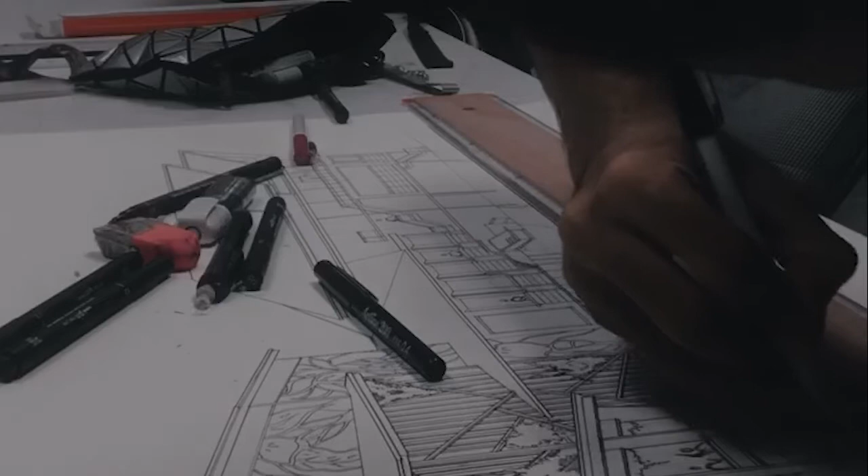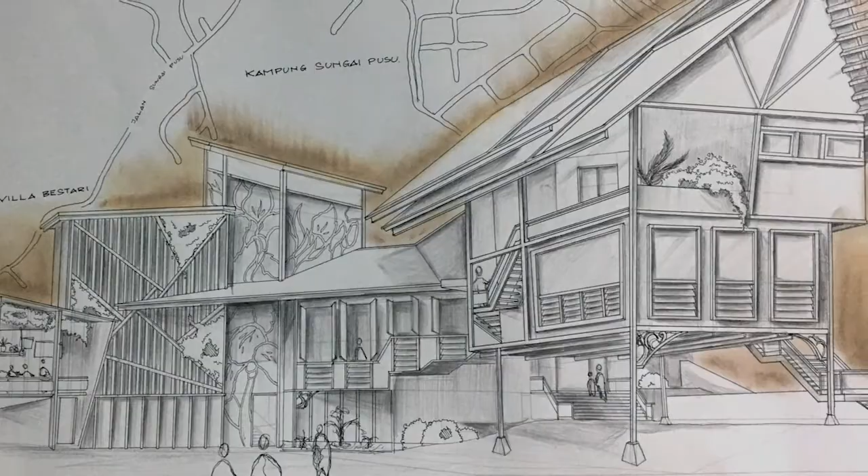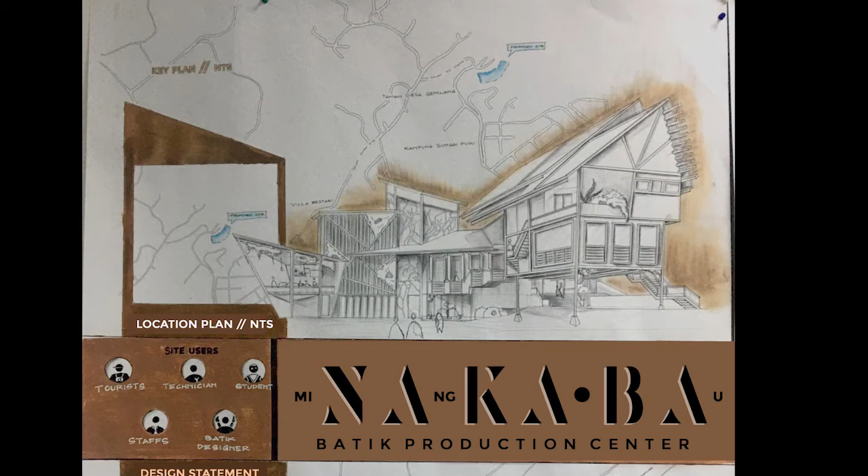Today I'll be presenting about the Nakaba, which is a batik production center that functions as a commercial and education center. The building specializes in providing job opportunities and revitalizing batik culture in Kampung Sungai Pusu. The site, Site B, is located on a steep slope beside Jalan DJ Utama. The building design signifies the colliding culture of Minangkabau, which is the origin of Kampung Sungai Pusu residents, and modern contemporary design to highlight the client's signature batik style. The users of the building will be tourists, technicians, students, staffs, and the batik designer.

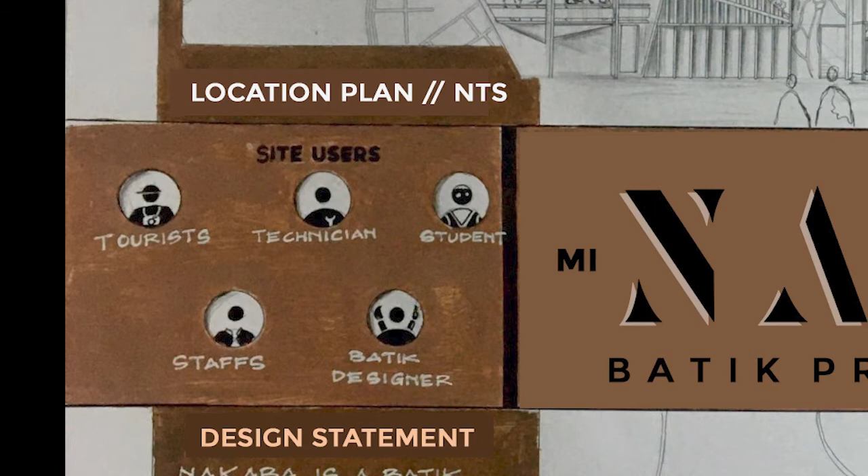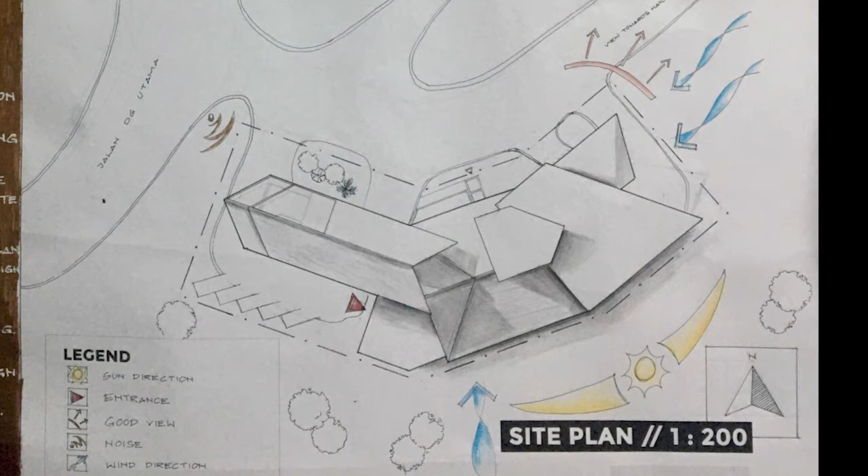According to the site plan, the site is located on a steep slope while having a prevailing wind that comes from the northeast and south directions. The building has openings that face toward the northeast and south to allow natural ventilation into the building, as well as to eliminate chemical gases from the batik workshop easily.

The client for the building is named Farah Mohan. She lives in Damansara KL and owns a batik business known as Novak Batik. Her preferences are she likes to integrate nature within space, likes using bamboo as a building material, prefers an interior of bohemian concept, values her own privacy and prefers a private studio. She also likes the concept of being mysterious and inspirational towards others.

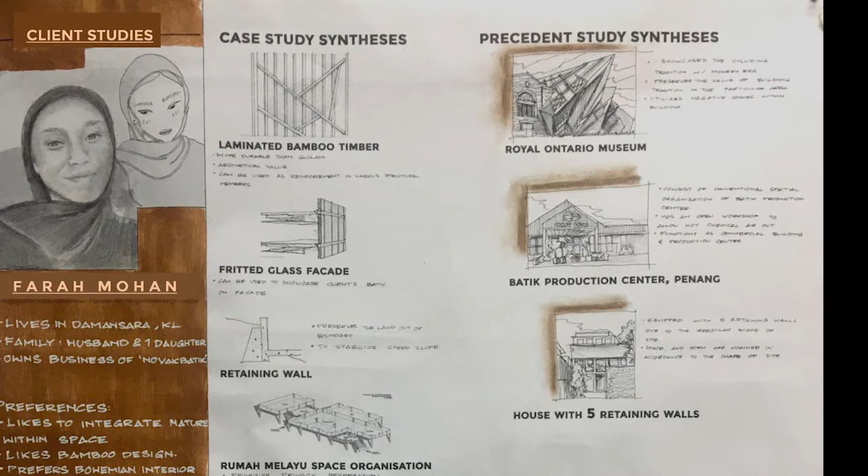For the first case study synthesis, it is to apply laminated bamboo timber since it is more durable than glulam, has an aesthetical value, and can be used as reinforcement in various structural members.

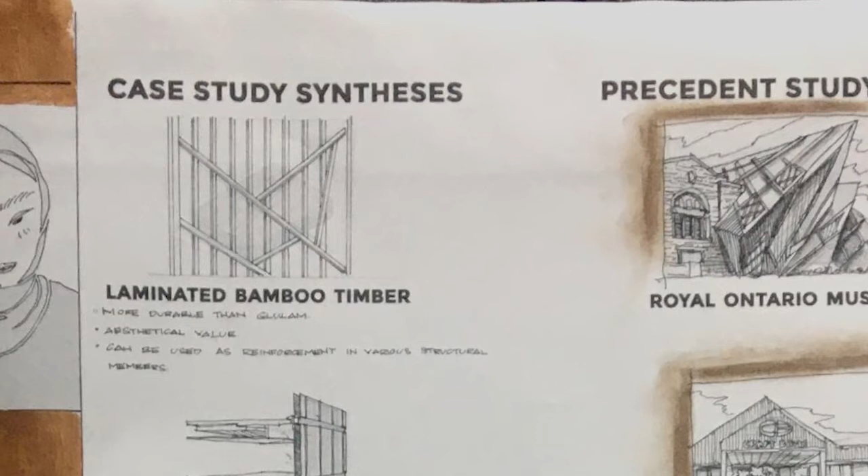Next is the application of fritted glass facade. This idea can be used to showcase the client's batik on the facade of the building, similar to Menara Suasana in Putrajaya. The next study is to apply a retaining wall on the building since it is located on a very steep slope.

It will preserve the land of the boundary as well as stabilize the steep slope itself. The last case study is to apply the Rumah Melayu space organization within the building.

This is because the Rumah Melayu has an ideal way of segregating the privacy of spaces. For example, the lobby of the building acts as a serambi of the Rumah Melayu, while the corridor to access other spaces acts as a rumah ibu, and the office and private studio act as a kitchen, similar to the Rumah Melayu, which has the highest privacy.

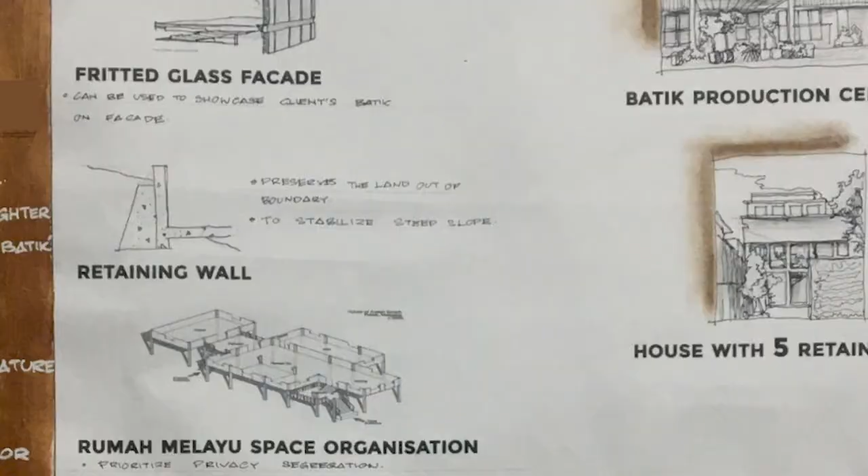Next we move on to the precedent study synthesis. The first one is the Royal Ontario Museum. This building showcases colliding tradition with modern era, and some parts of the building since centuries ago are preserved to show the traditional value of the building, and also utilizes negative spaces within the building as well.

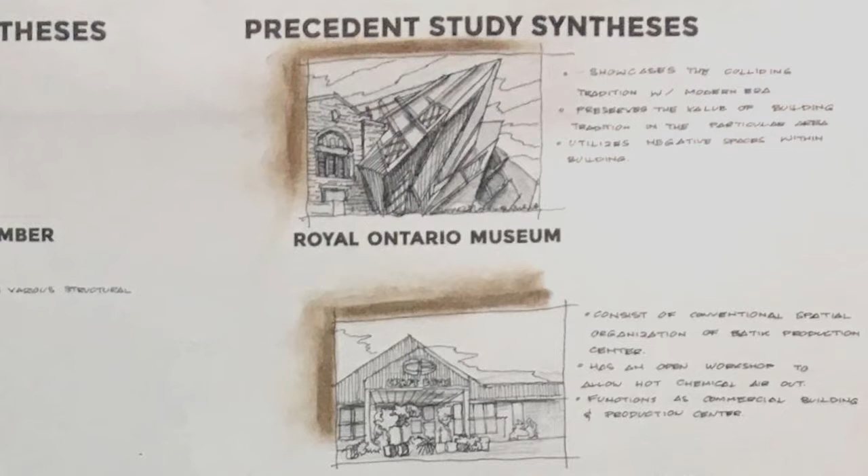Next is the Batik Production Center in Penang. It consists of a conventional spatial organization of a Batik Production Center. It also has an open workshop to allow hot chemical air out and to allow natural ventilation into the building, while functioning as a commercial and production center as well.

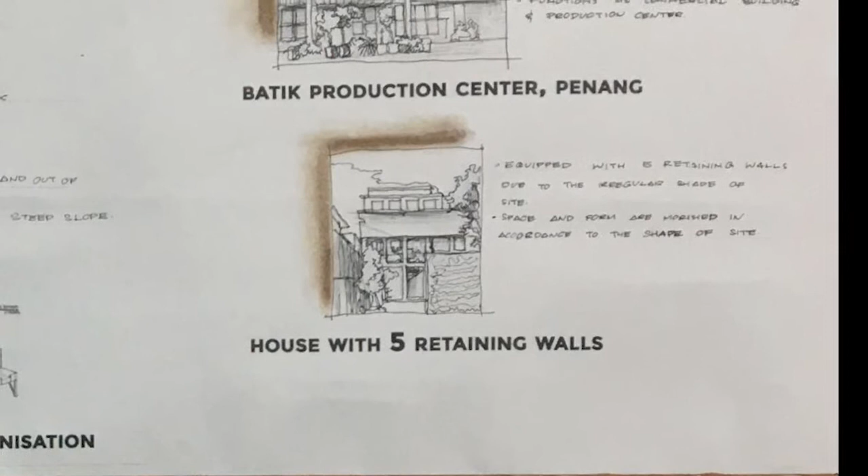The last precedent study is House with 5 Retaining Walls in Japan. By the name, it is equipped with 5 retaining walls due to the irregular shape of the site, and the space and form are morphed in accordance with the shape of the site.

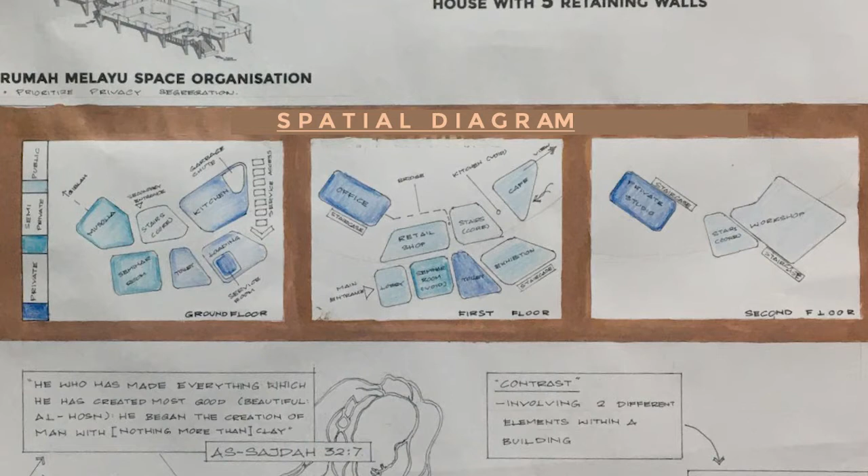Next we move on to the bubble diagram of the building. As we can see from the ground floor plan, most spaces are semi and private spaces. This is to ease access for services within the building, while the first floor plan is known to be the prime level of this building since all of the commercial spaces are placed within this space.

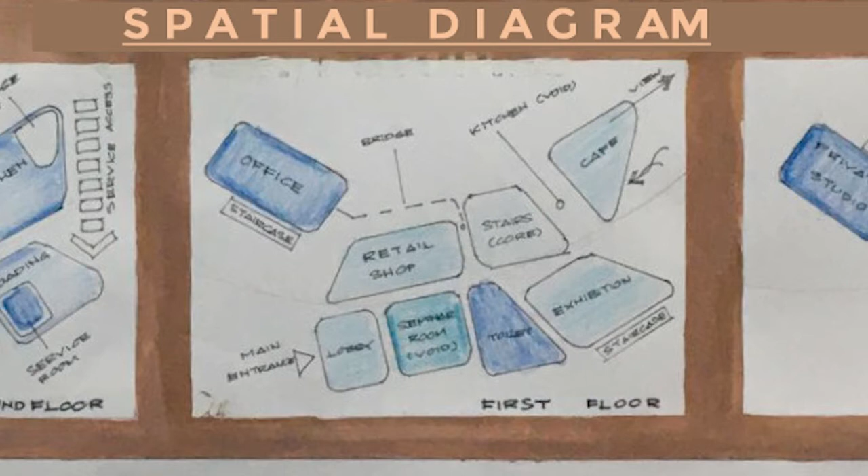Since the site is located on a steep slope, the main entrance is placed on this floor as well to ease access for the public in the building and not to interrupt the private spaces.

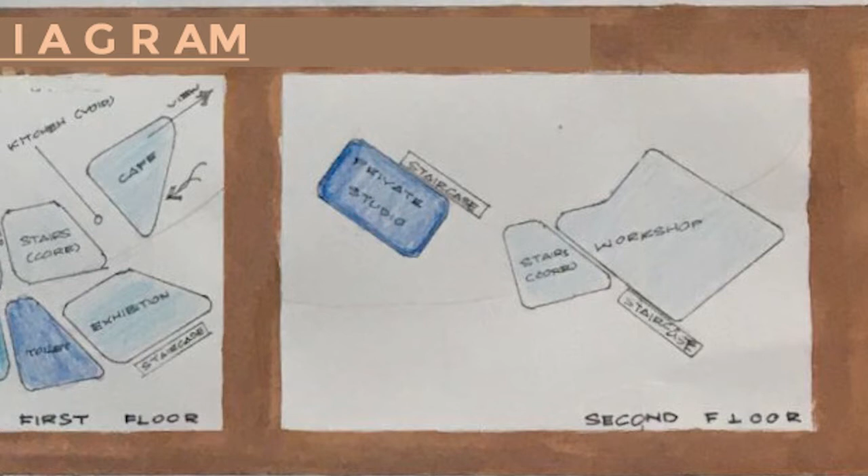The second floor plan only allocates two spaces: the workshop and the private studio. These two spaces are segregated and cannot be accessed on the same floor since the workshop is a public space and the client wants her own private studio, which is located on the west side of the site, segregated from the public spaces.

The vertical circulation of the building is placed on three different sides. The core of the building is placed in the middle, while two private staircases are placed on either side of the site to ease circulation. All of the staircases act as fire staircases since the exits of the building are located at the bottom of all the staircases.

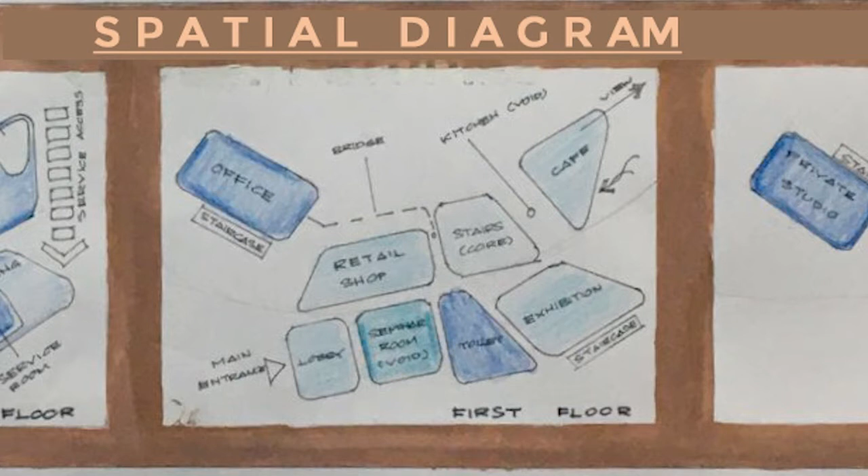Next we move on to the concept studies of the building. The concept comes from two main ideas: first, the Batik Production Center is to revitalize the culture of batik and introduce the modern style of batik which the client specializes in, while providing job opportunities in the area. The next idea is the summary of the site.

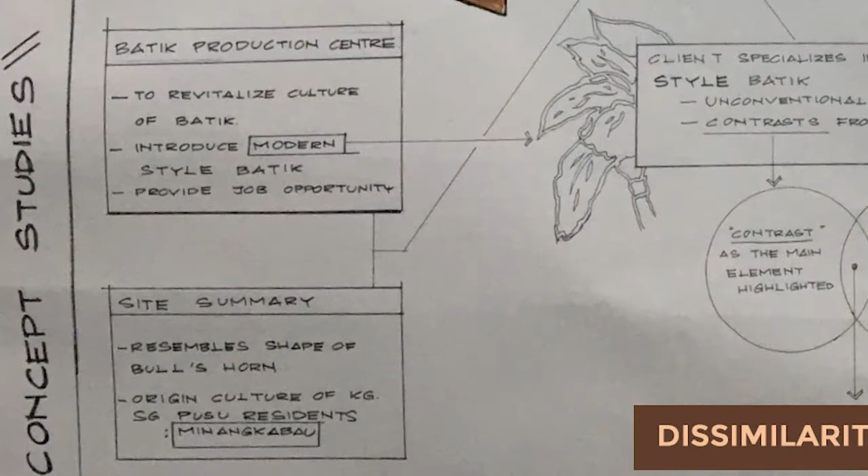The shape of the site kind of resembles a bull's horn, and this idea can be related to the origin culture of Kampung Sungai Pusu residents, where most of them come from the Minangkabau tribe. That's where the word 'inspiration' comes forth, and it can be related with Surah As-Sajdah, Ayah 7.

He who has made everything which He has created most good, that is beautiful, Al-Hosn. He began the creation of man with nothing more than clay.

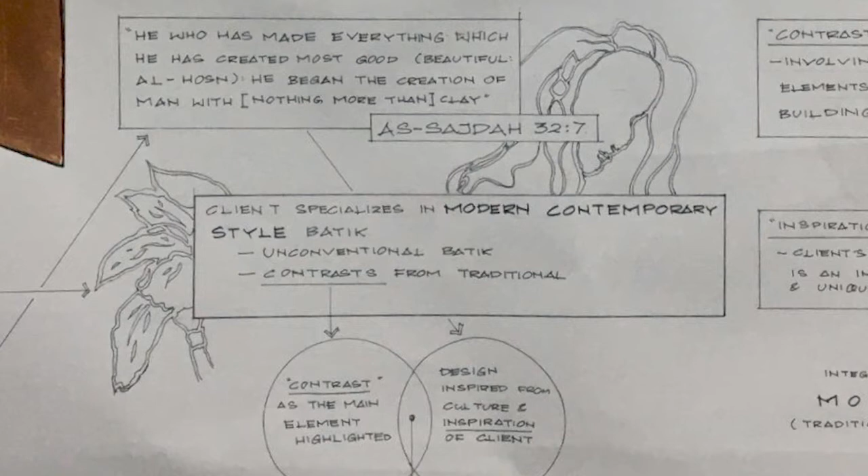Something that is inspired can be related with what the client specializes in, that is modern contemporary batik. It is known to be very unconventional since batik is traditionally known, and it contrasts with the conventional one. By taking these two main points, contrast as the main highlight and design inspired from the culture and inspiration of the client, we get the concept of dissimilarity stimulus, or in simpler words, contrasted inspiration.

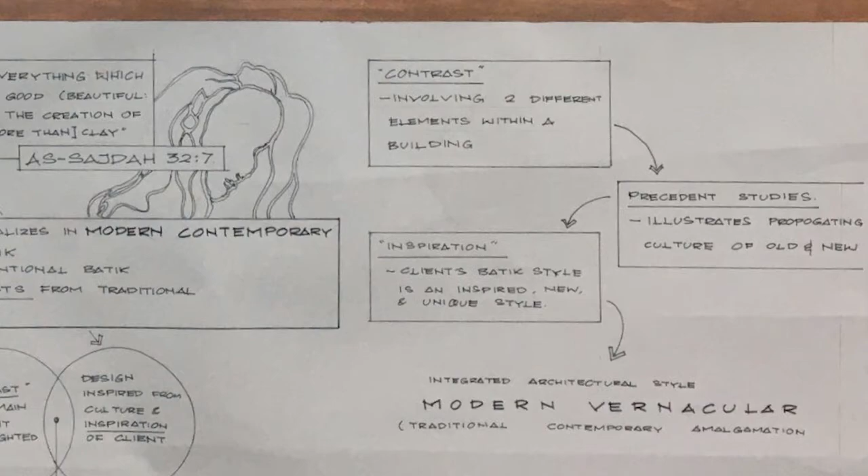From the two ideas of contrast and inspiration, with the appropriate precedent study that illustrates propagating culture of old and new, we get the architecture style of modern vernacular, a traditional-contemporary amalgamation.

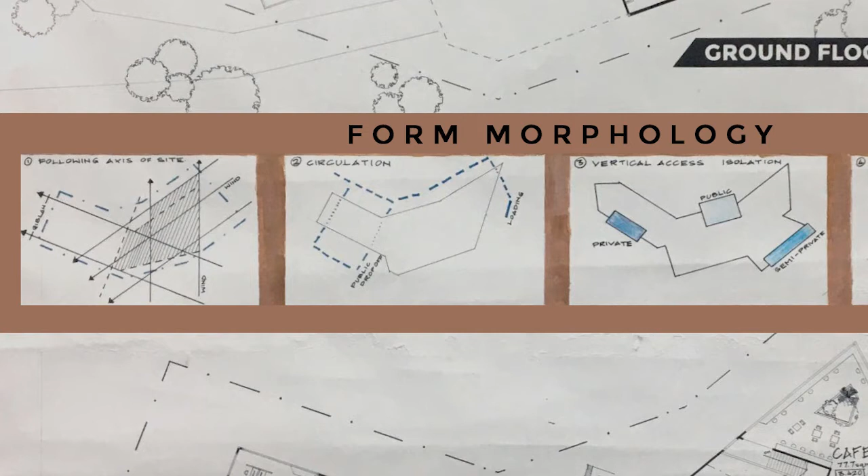Next we move on to the morphology of the form. The form comes from three different axes, which are Qibla, view, and wind direction. The next step is to consider the circulation of the building.

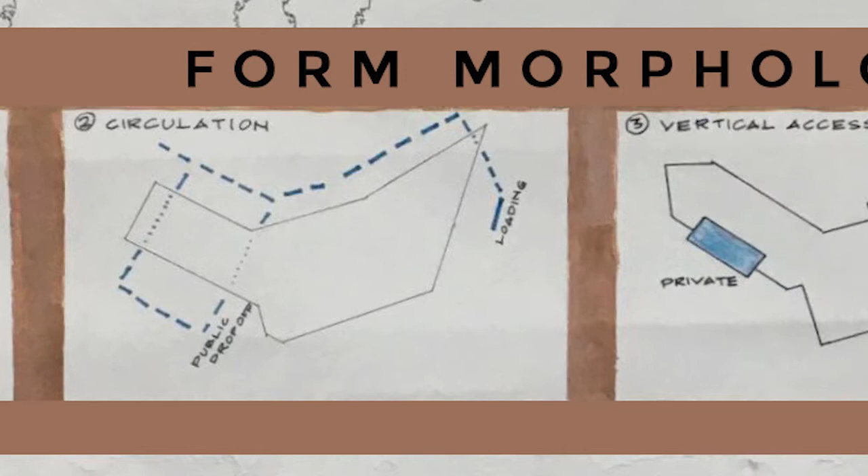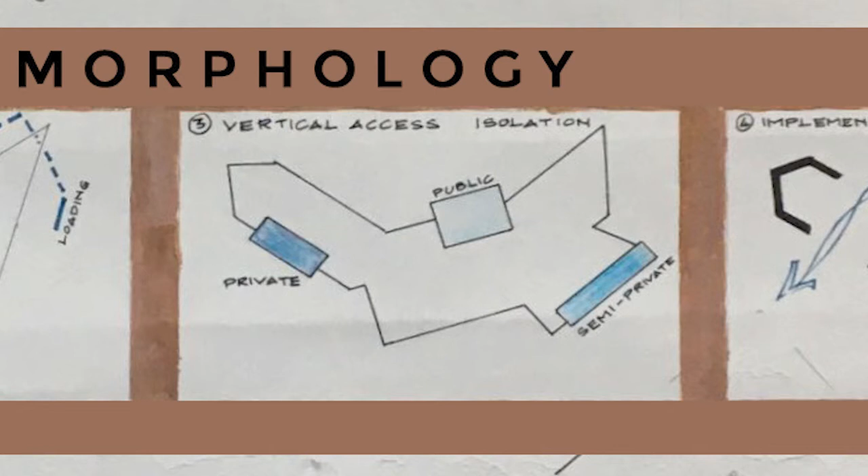It segregates into two different circulations: the west side is allocated for the public while the east side is for service vehicles. As mentioned before, the building separates into three different vertical access: private on the left side, the public access staircase in the middle, and the semi-private staircase allocated on the east side of the building.

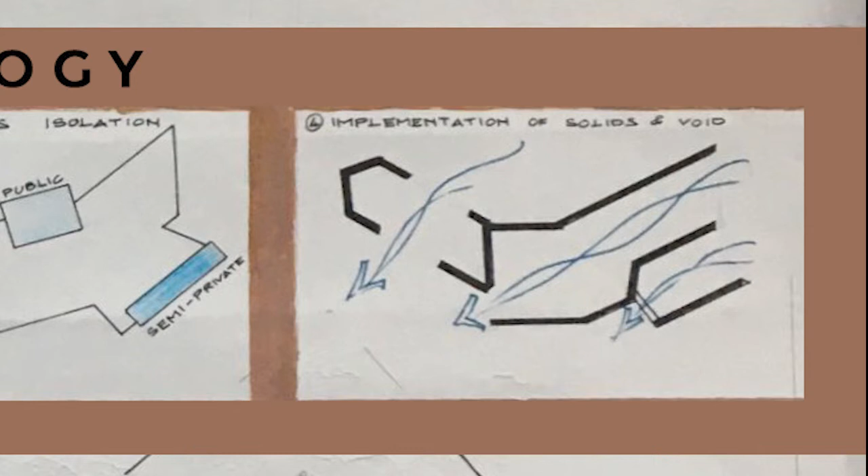Last is the implementation of solids and voids to allow natural ventilation and for users to look over to the good view. As mentioned before, the building separates into two different circulations: the left side is for public while the right side is for service vehicles.

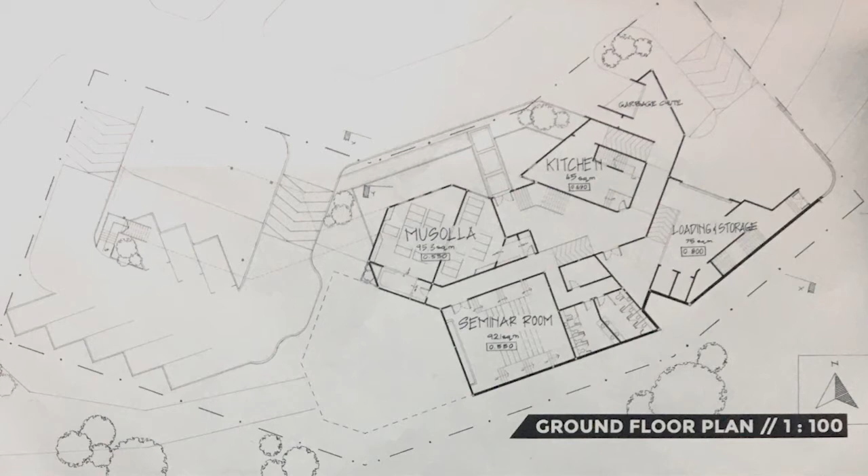The spaces for the ground floor plan are mostly private and semi-private. This level can be accessed through the secondary entrance, allocated just nearby the staircase in the middle of the building, easing access to the musolla, seminar room, and toilet from outside the building. The right side of the building allocates the kitchen and loading storage to ease access for services, with the garbage chute placed just beside the kitchen.

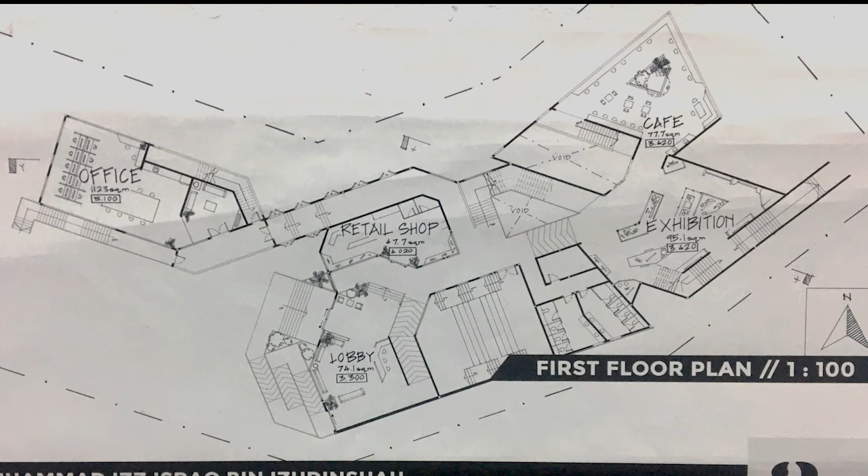Moving on to the first floor plan, the main entrance is placed on the southwest side of the building, so the user will overlook towards the retail shop directly beside the lobby and the seminar room as well. And when they move further into the building, they will meet the open cafe towards the view of the site and also the exhibition.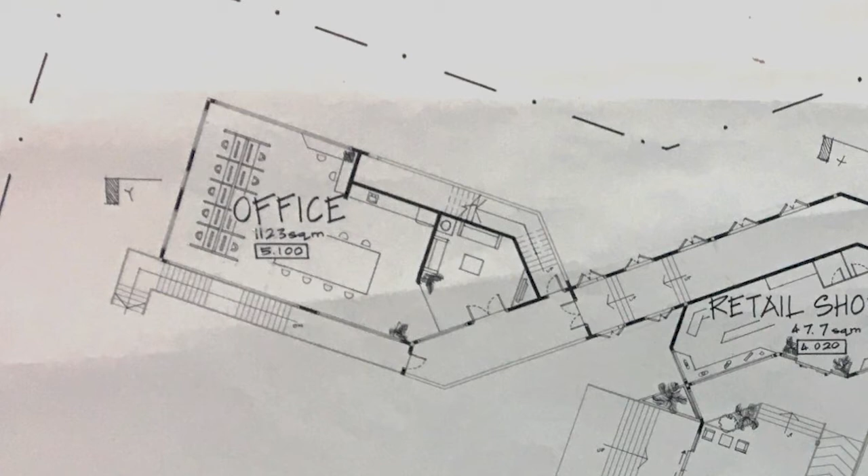While on the left side of the building is allocated office, which is a private space, so it has its own set of staircases to access the particular space, which is above the parking lot.

Meanwhile, the second floor plan consists of two spaces, which are the private studio and also the workshop. The workshop has 4 different spaces for each of the batik making process. The first one on the top left side is the canting or block printing area, while beside it is the painting area for batik.

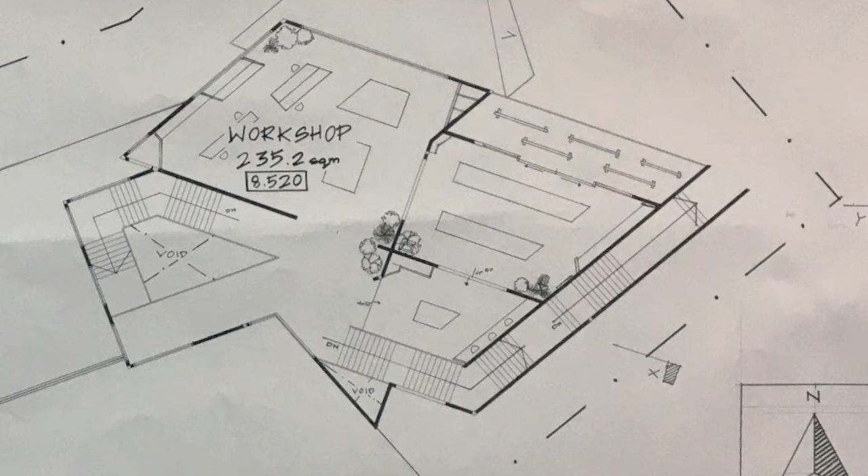After done with the painting, the batik maker will then go to the lower part of the space, which is the soaking area, to wash away the chemicals from the batik. After soaking, they will then go to the uppermost part, which is the drying area, to dry the batik and to be ready to be sold.

While the client's private studio consists of many plantations in order for her own productivity, since she is known to work well with greeneries and nature in her own surroundings. The private studio also allocates its own private bathroom and also pantry in order for the client to feel herself at home.

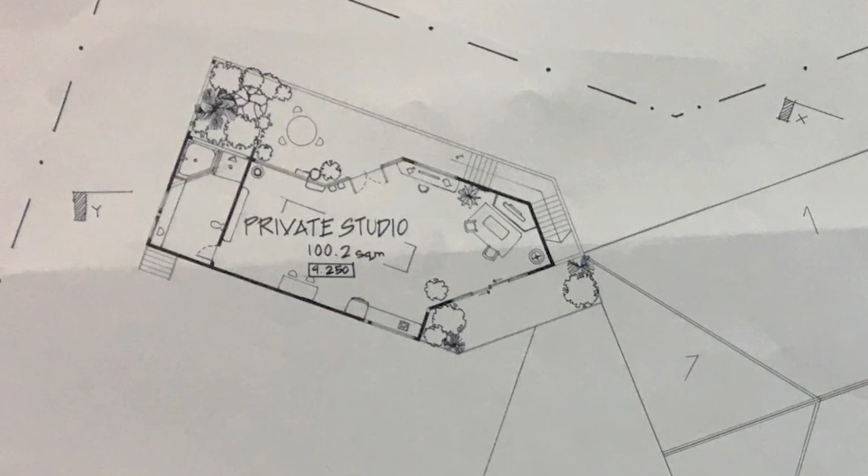So these are the interior perspective of the building, where we can see exhibition, cafe, workshop, and also seminar room.

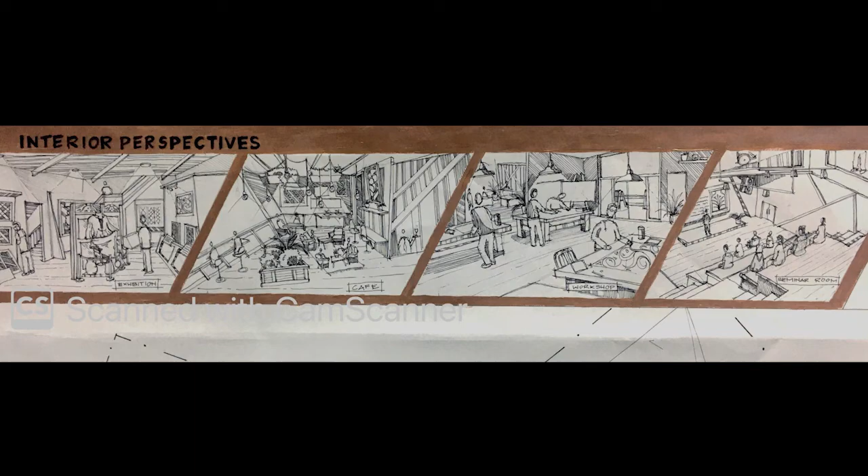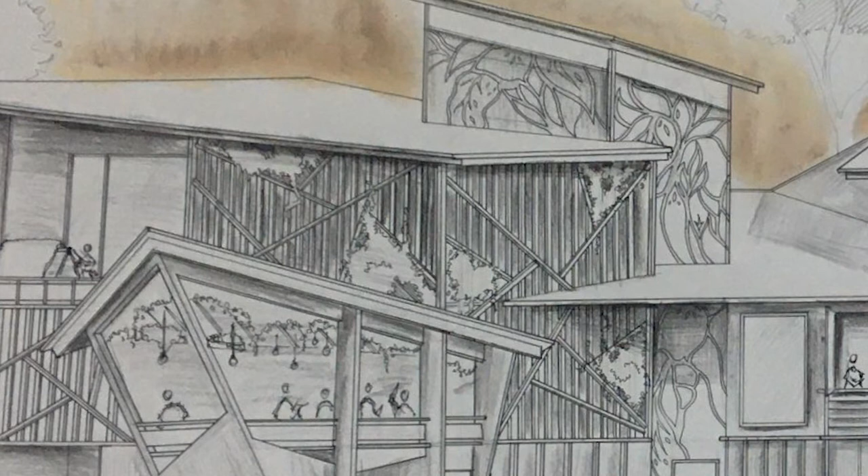To be seen the building from the southeast elevation, as mentioned earlier, the building consists of 2 different styles, which is on the right side consists of vernacular Malay style, while on the left side mostly are contemporary style. And the walls for the workshop consists of laminated bamboo louvers in order to eliminate the chemical gases out of the building

efficiently. So the building structure consists of timber construction, and from the ground part of the building, it consists of concrete masonry and having a retaining wall on the rear part of the building to withstand forces coming from the slope.

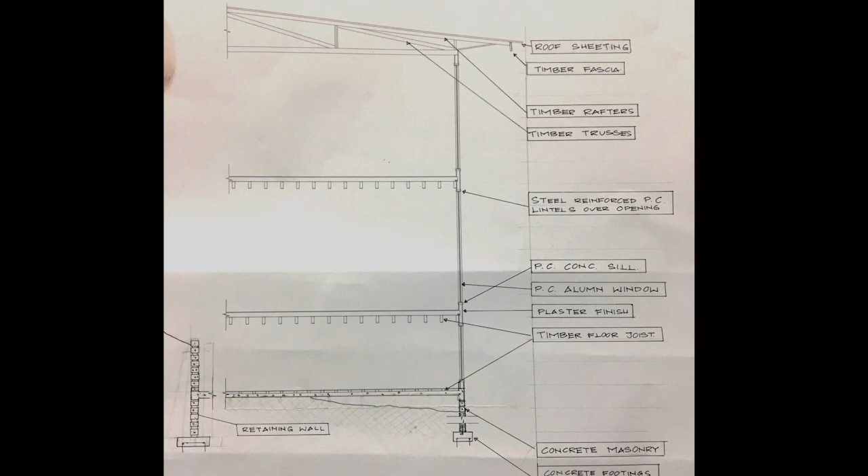While the roofs consist of timber construction as well, and most part of the building uses mono-pitch type of roof.

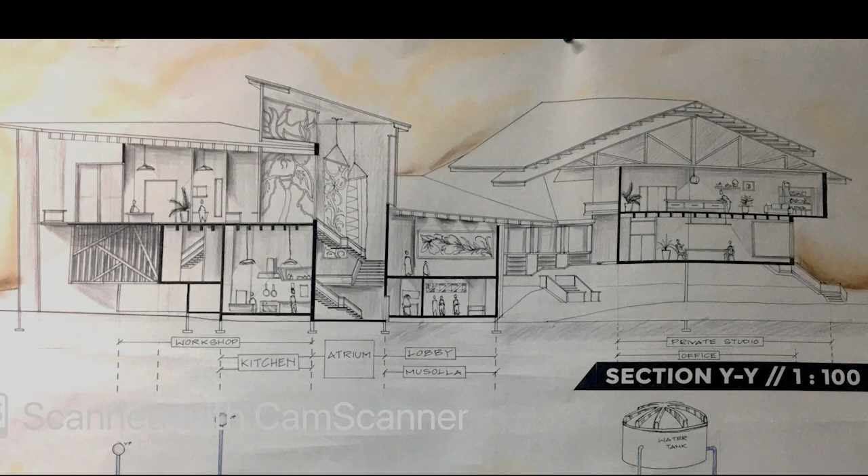And this is the section YY, and we can see the dominant atrium, which is the hierarchy of the building that holds the building together. It has a batik display on the middle part of the staircase while having faded glass with the client's batik all around it. While the private studio is designed to be like a home studio for the client in order for her own productivity.

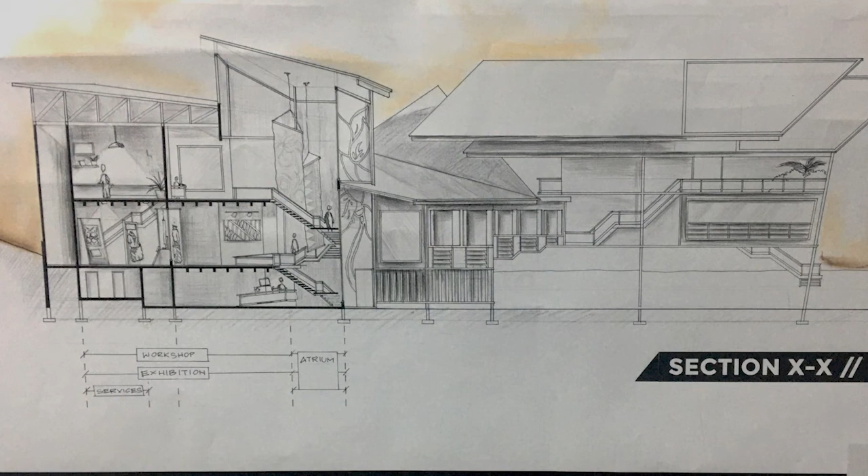And from the section XX, we can see the workshop on the top part, while the exhibition is below it and the services room on the lowest part of the building.

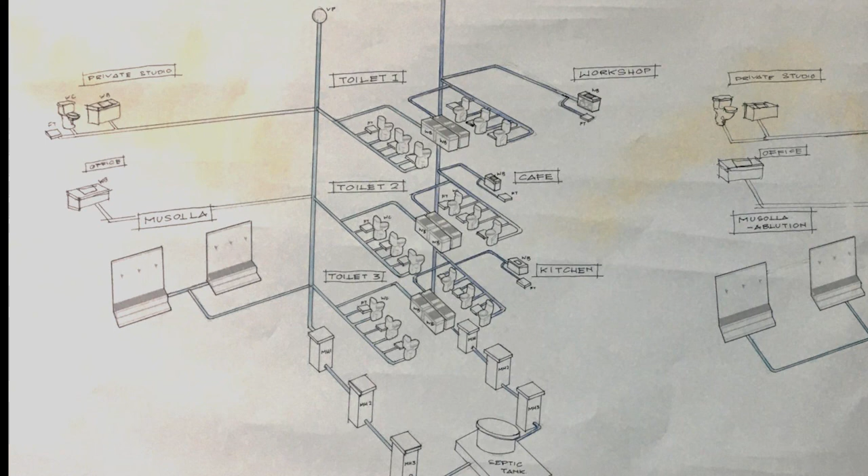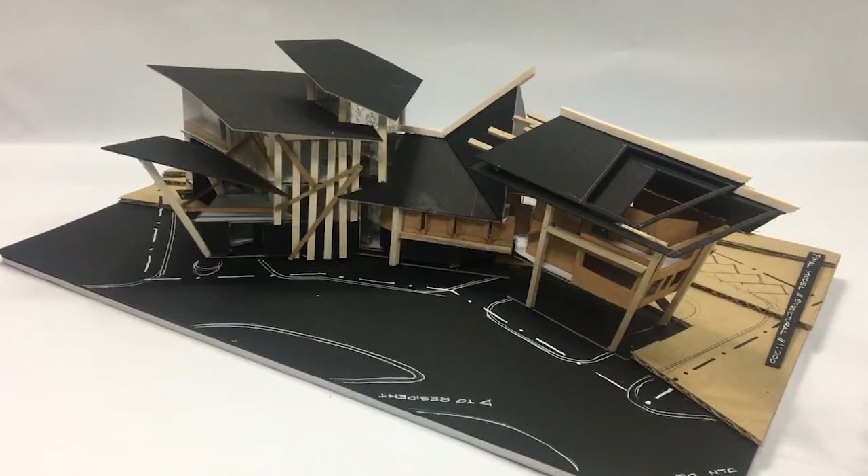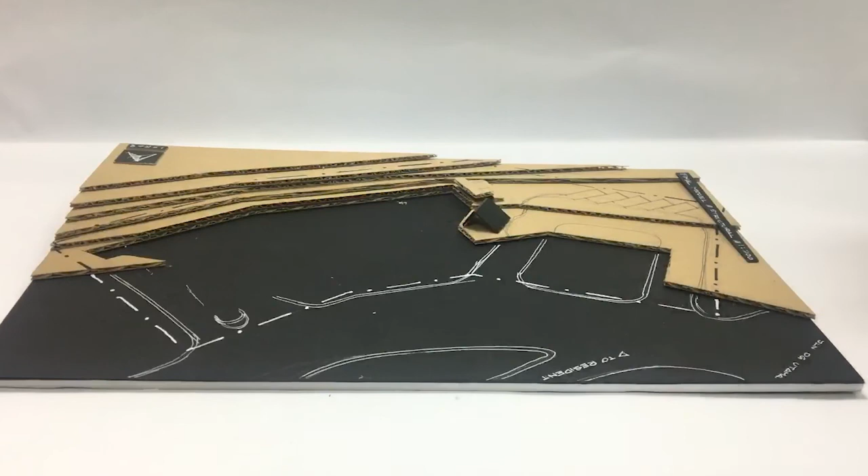And for the construction model, the building uses post and beam structures, while the white one serves as the core of the building, which is the staircase.

And that is all for the Nakaba the Batik Production Center presentation.